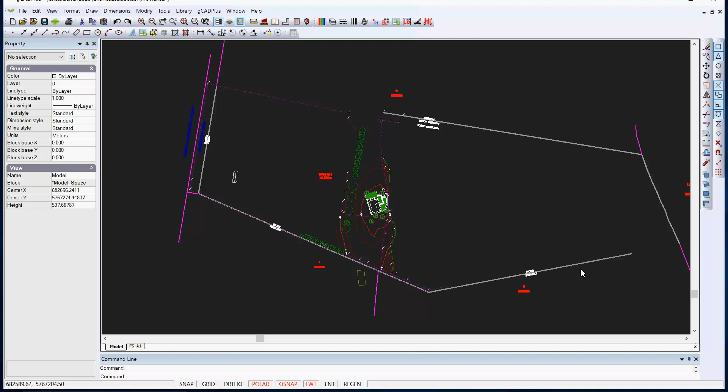The first thing to check is, if we zoom out a little, you see there's what would appear to be a base drawing done by a surveyor, and the location of a new house or an existing house is to go here in the centre. The first thing to check is have a look at the units that have been used. So measure something of known length and see what you get with the distance command.

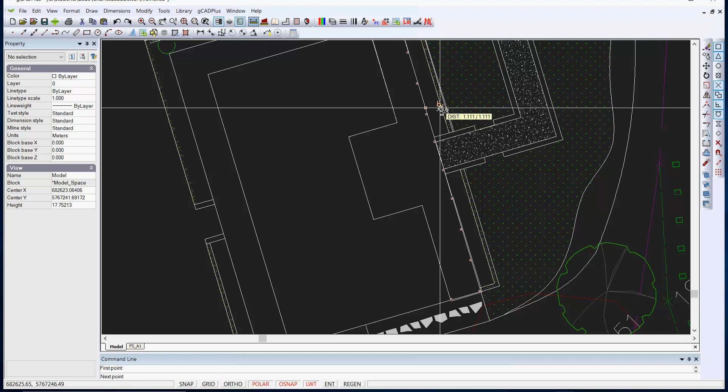So if I take the distance command here, and there's a pathway in front of a veranda, so we'll use the distance command, latch on to, say, the midpoint of that line and run perpendicular, and maybe if I zoom in a bit, can you see that as I click around, the cursor's jumping everywhere. It's looking for an insertion point currently, perpendicular to it can find. So I would argue that working with so many O-snaps turned on is not the sensible way to work.

But let's pick perpendicular, and you would have noticed that I got a distance of 1.111. Now, most building work in the metric system, and that includes landscaping, is done in millimetres. So the base drawing's been done by a surveyor, I suspect, and they are working in metres. So what should have been done here is the base information should have been scaled by 1,000 to bring everything to millimetres. Let's illustrate why that can be a problem.

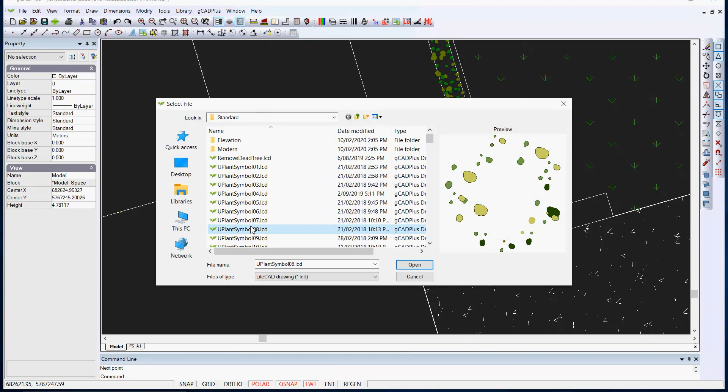If we go to the library and plants and go to standard, and we just take some symbol at random, this one will do, and I'll say I'm going to open it, and we're going to insert it into the drawing. Now, remembering that in gCADPlus, all of our symbols are drawn with a canopy diameter of 1,000 units or a metre.

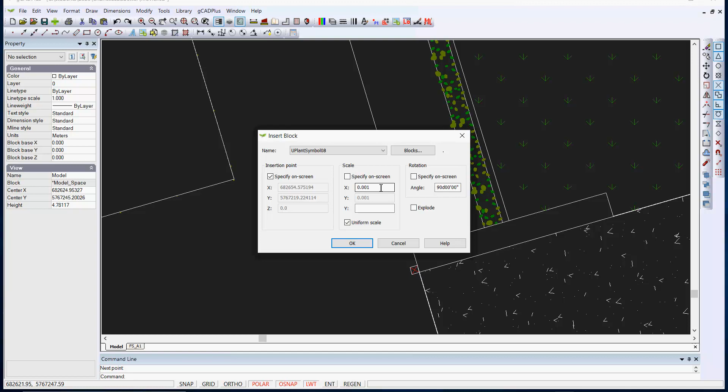So because the base drawing is in metres, and we're going to bring in a symbol which in effect is 1,000 metres in diameter, we're going to lose track of where it is, and we're likely to leave scattered all around the drawing blocks that we've brought in and lose. So knowing what we know, we need to bring it in at a scale of 1 to 1,000. So I have to type in 0.001, and now with a uniform scale, when I bring that symbol in, I can pop it, say, in the lawn area there, so the symbol goes in correctly.

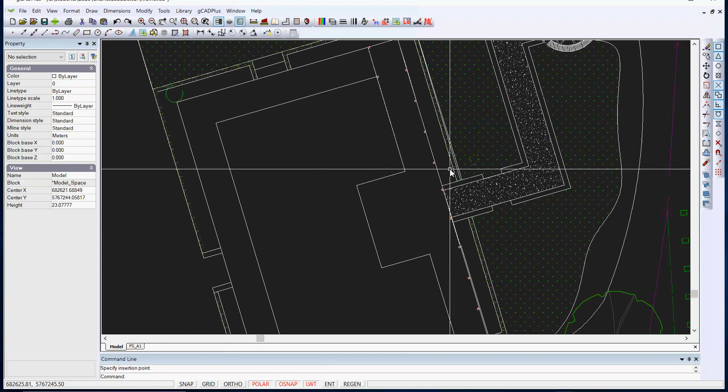But if I don't take the trouble to put 0.001 in there, I leave myself open to losing symbols and getting lost. Speaking of getting lost, let me just zoom out a little, and I'll zoom out further and further and further, and you just might be able to see in this zone here there's some sort of symbol. So let's zoom in on it, and let's see how close we can get into the symbol. So there's a really complex symbol here, and it's called U-plant hedge.

Now that looks nothing like a hedge to me, but it sits way, way off and away from the base plan. So that looks to me as though some editing has been done with some of the symbols. Picking one of these symbols and editing it, renaming it on the fly and redefining a symbol can lead to a problem such as this. So it's better to stick with the symbols that come in with gCADPlus rather than try and edit them.

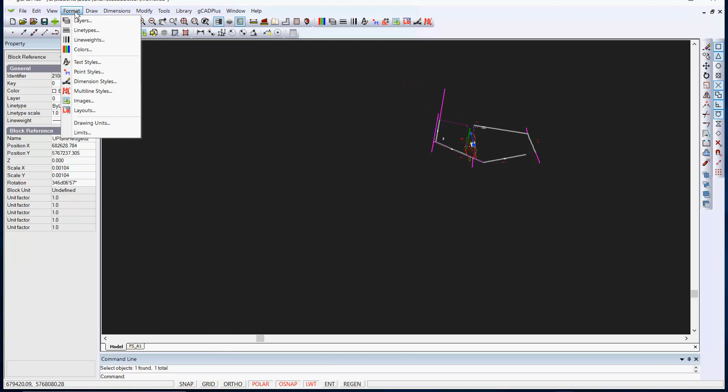There's another issue in this design, and it all comes because you've taken an AutoCAD drawing from a surveyor. The settings in the incoming drawing are of course captured in gCADPlus, and if we go to drawing units, it's decimal, which is what we recommend. I'd probably be inclined to say if we're going to bring something in, scale at millimetres, but notice the angular measurements, degrees, minutes and seconds.

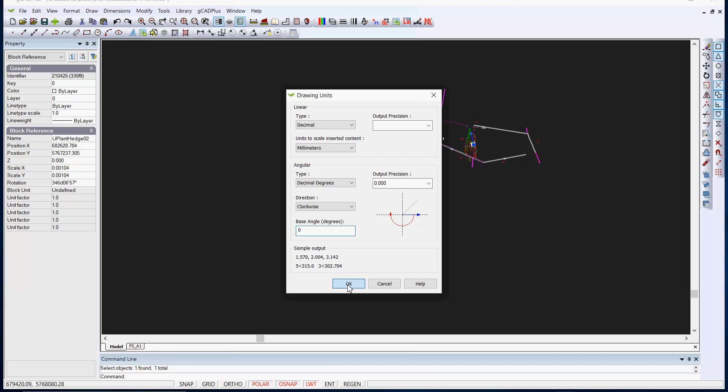So even though I'm told an architect has had hold of the drawing, it's been left in surveyor's units. We want to bring that back to decimal degrees, and you'll see it's degrees, minutes, seconds, which is something that we all find difficult to work with. And you might want to change your base angle and set back to 0 or 90, whatever you're happy to work with. And I'd recommend that you set that to AutoCAD's default, which gives you what we learnt to work with as children with protractors. So we'll say OK. Can you see that I've not looked closely at this drawing, but I can see quite a number of problems with it.